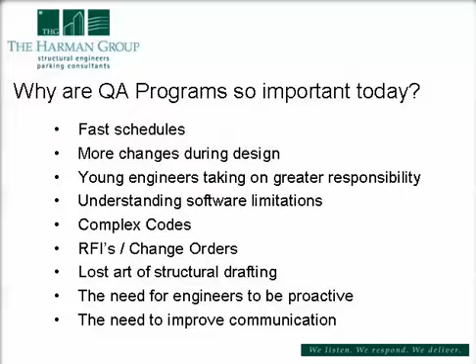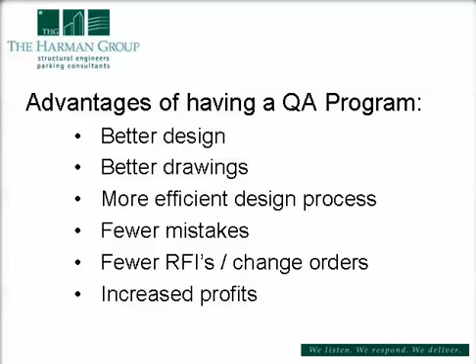So the advantages of having a QA program are we're going to see better design, better drawings, a more efficient design process. There should be fewer mistakes on our contract documents, fewer RFIs and change orders, and since we're all in business to make a living, earn a living, increase profits, hopefully.

Now, before I talk about our QA program, I just wanted to point out two publications that everybody in this room should have a copy of. The first one is CASE document 962D, a guideline addressing coordination and completeness of structural construction documents. This came out a couple of years ago, and basically this could serve as a template for producing a quality assurance program. It basically addresses the reasons why structural construction documents have suffered in quality over the last few years and what can be done to turn it around.

The second publication I recommend is The Contractor's Guide to Change Orders. When I came across this book a couple of years ago, I felt as if I was a football coach who stumbled upon the other team's playbook. This publication basically tells contractors how to mine a set of contract documents for change orders. So I read the book, and I just made sure if they said, look for this, I made sure our drawings didn't have that flaw.

So I highly recommend both of these publications. This is a little bit more entertaining reading, only because you can feel the pain as you read that and realize that, geez, that contractor has this book.

Okay, 20 years ago when we started our QA program, it was comprised pretty much of a QA manager who was in the office 8 hours a day and available to answer questions. And before our projects went out for bid, he did a single QA review and reviewed the drawings for mistakes and for completeness. But because of fast-track scheduling, that process doesn't work anymore.

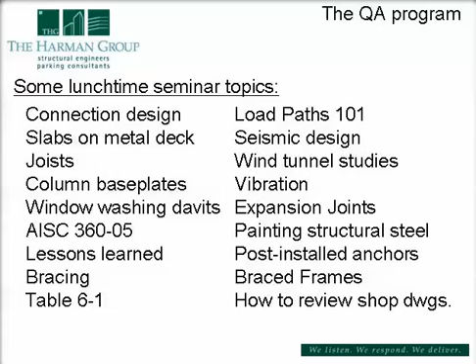Design standards. We have in-house design guides, office standards, and checklists for all topics related to structural engineering. The purpose is that there's more than one way to design a building. With steel design, you can either use ASD or LRFD. Each one is perfectly acceptable, and there's no problem unless one engineer is putting service load reactions on the drawing and another is putting factored reactions on the drawing. That could be a problem. So to get everybody on the same page, you have to have office standards.

Checklists are invaluable. They serve as a roadmap of sorts to help engineers go through something they've never done before - window washing davits, for instance, again as an example. What do you have to know about them? Where are the typical details? How do you design them? What are the loads? The list goes on, basically endless. Our quality assurance program is an ongoing work in progress, and it'll never be complete. As we come up with new things, we add them.

Drafting and CAD standards. I was talking before about the lost art of structural drafting, and our drafting and CAD standards try to address that problem. We have standardized drafting procedures, checklists, typical details, go-by drawings, and standard blocks. The big thing on this list is the go-by drawings.

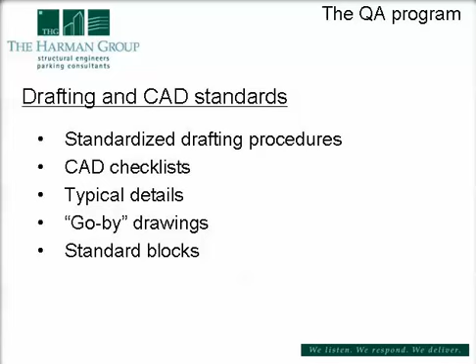If our framing plan is missing something, if somebody says you don't have a whatever, we'll add it. The other advantage of go-by framing plans is they prevent a gradual divergence in standards. As companies get bigger and you open multiple offices, you can gradually see changes between offices - a divergence - and this is an attempt to address and prevent that.

Our project delivery system is basically a series of checklists and procedures that help take engineers from the beginning of a project through the end. This is the roadmap that they follow.

At the beginning of a project, in the project startup folder, there are checklists telling the engineer what they have to do. One thing is to fill out a design criteria form, which has all the loads, design standards, fire ratings, everything related to wind and seismic. That form is filled out and updated as more information becomes available, and it's there for everyone working on the project to see in the project notebook, so there's never any question about the design standards for that particular project.

The engineer is told to set up a meeting with the project manager and the quality assurance manager, and we go over the project and how they intend to frame it and all the little details. We talk about various structural systems and the optimal way of framing the steel, if it's a steel building, etc. Then you carry the project through, and when you get to construction administration, we have checklists for structural steel shop drawing review.

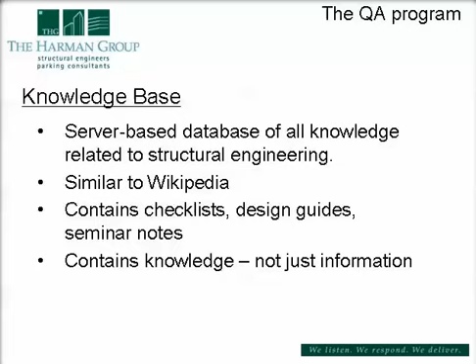It explains what could be a difficult topic and puts it into perspective. And finally, the sixth component is involvement of the QA manager: establishing and maintaining design and drafting standards, answering technical questions, staff training, performing QA reviews, and reviewing the framing plans and details before they go to CAD.

I want to see the details before our CAD department spends a lot of time drawing them up. I don't want to get 5 sheets of details and bleed all over every detail. That's demoralizing to me, and it's demoralizing to the engineer who did the details. And the CAD guys are going to be grumbling. So it's better to work through all of the problems with details before they're drawn up.

And that also provides valuable one-on-one training between myself, or another senior engineer who might be helping out, and the engineers who are coming up with these details.

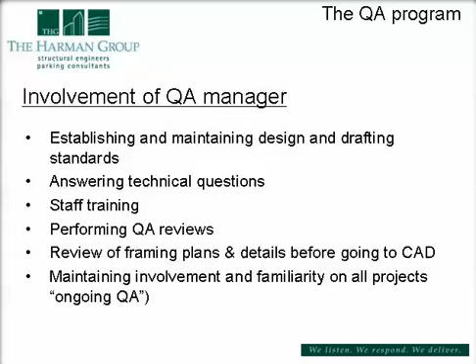One of the important keys to quality assurance is that it be ongoing. It's not enough just to get a set of drawings thrown on your desk at the end of a job. QA has to be an ongoing process, and it requires the QA manager to maintain some level of familiarity with all the projects as they progress through design. It's more or less a proactive approach to catching problems early before they become difficult to fix. Ongoing QA is basically the key to enhancing efficiency and productivity and squeezing as much as we can out of the QA process.

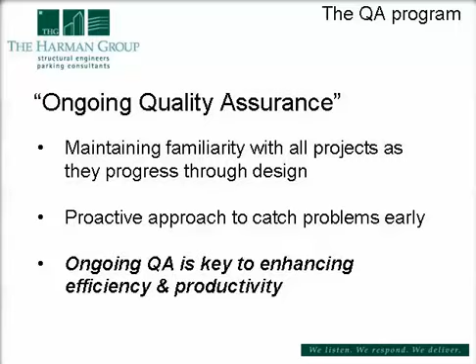So that was a summary of our QA program. Now I'm going to talk about the quality assurance review strategies and tactics. QA reviews are in-house reviews conducted to verify that our design and documentation is in conformance with the procedures and practices mandated by the QA program.

There are two primary purposes. As structural engineers, we all know that redundancy is good, right? As the QA manager, I'm not the primary load-carrying member of the design. The primary responsibility to get that design right falls on the design team in our office working on that project. But the QA manager provides a second set of eyes in order to catch mistakes that may have slipped through the cracks. And the second purpose of the QA review is to monitor the effectiveness of the QA program.

If I continue to see a certain problem slipping through on job after job, that's a sign something isn't right with the QA program, that something has to be fixed. We had this problem a couple years ago with the seismic response coefficient for steel structures. In areas of low seismicity where most of our work is done, you want to use an R factor of 3. But I was seeing 3.5, 6, because engineers would figure if 3 is good, 6 is even better, not realizing they were putting a lot of cost into the connections. Since we design our own connections, they didn't even know what was involved in designing a connection with an R factor of 6. It was that unknown about what the seismic response coefficient was doing that led us to add information to the QA knowledge base, and we gave seismic seminars to drive home that point.

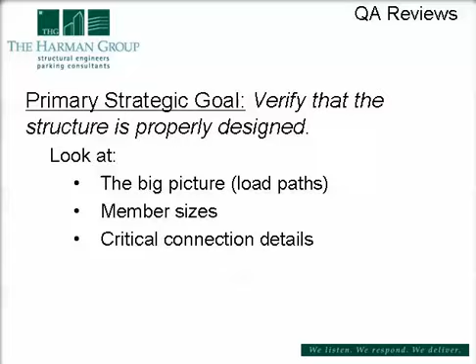There are two overriding goals when performing a QA review. The primary strategic goal is to verify that the structure is properly designed -- not to oversimplify it, but basically to make sure the building doesn't fall down. That involves looking at the big picture, load paths, member sizes, and critical connection details. The secondary strategic goal, in simple terms, is to make sure we don't get sued -- to make sure our construction documents are complete, coordinated, and correct.

We want to look at the drawings through the eyes of everyone that's going to be using them. Is the contractor going to be able to understand our drawings and get all the information they need to build the structure? Is the detailer going to get all the moments, reactions, shears, member sizes, and have all the dimensions? Are the inspector and building official going to understand our design intent? And the engineer performing a peer review, is he going to understand our drawings, are they complete and correct? And likewise for the engineer shooting spitballs at our design.

The young engineer reviewing shop drawings is important, because if that young engineer can't decipher what's on our drawings and can't clearly understand the structural drawings, the likelihood of finding a mistake that slipped through the detailer is going to be greatly diminished. If our drawings are complete, correct, and coordinated, the detailer isn't going to have many mistakes on the shop drawings, so this young engineer is going to have a much easier time reviewing them. And finally, if something goes wrong, what is the legal profession going to say about the quality of our construction documents?

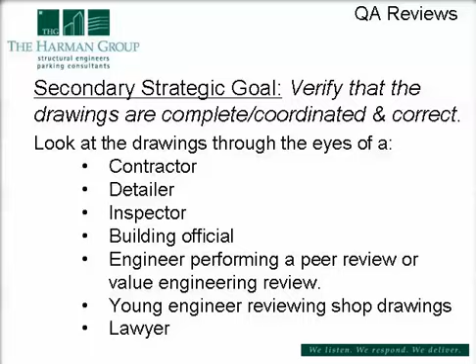So these are the tactics used when we perform QA reviews, and I'm sure anybody who has reviewed a set of drawings before can probably add to this list. But generally, you look at the big picture, verify load paths, etc., and I'm going to go into each of these a little bit in depth.

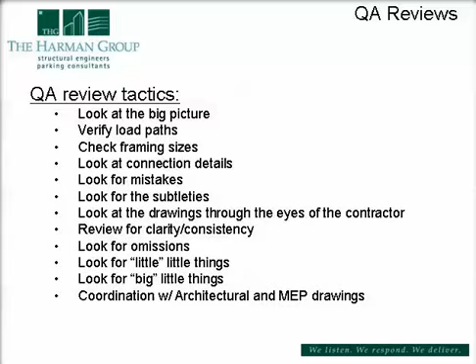Looking at the big picture -- engineers who work on projects every day can sometimes lose sight of the big picture. Someone with a fresh set of eyes on the structure can sometimes see things that pop out that weren't apparent to somebody working on the job every day.

Load paths, problems with connections, inefficient framing, the wrong loads being used, missing loads, problems with the computer model. I was reviewing a model a couple years ago, and the engineer had the switch turned on that generated the self-weight of the structure, but they thought that switch was turned off, so they put the self-weight in manually -- they had the self-weight in twice. So our foundations were a lot heavier, everything was heavier. That's better than the other way around, if they had the dead load turned off and only had the live load in. Problems with the R factor -- I discussed that before, that's something I think we finally got figured out in our office. And missing or improper expansion joint layouts.

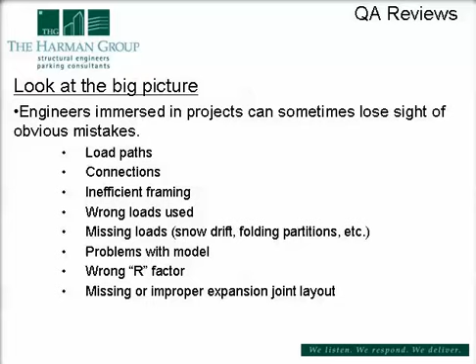Load path issues. Are there any unrealistic load paths? Are there any loads jumping in and out of shear walls or braced frames, or any unrealistically rigid diaphragms?

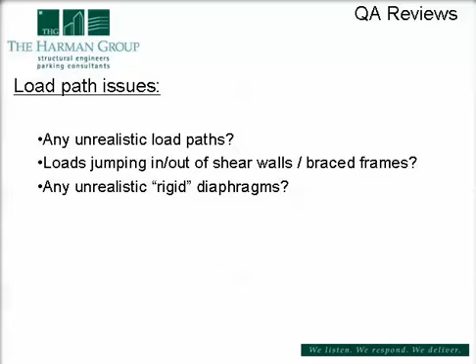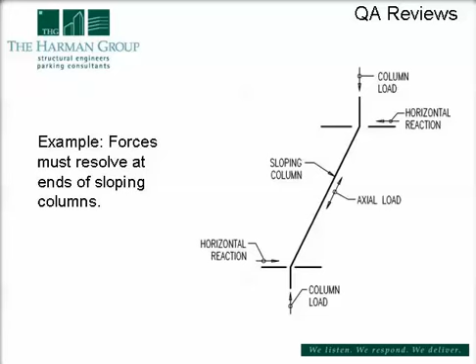Here's some examples. I know most people in this room probably figure this is too elementary to mention, but there have been real problems when engineers fail to consider the horizontal reactions at the top and bottom of sloping columns. Everything has to resolve out. It's not enough to just consider what happens here and design that member. You have to follow it to see how this reaction and that reaction eventually meet up again. Usually they cancel out via a braced frame or shear wall, or an opposing sloping column on the other side.

We did a job several years ago, a parking structure about 300 feet long, and we modeled it on computer with a rigid diaphragm, and it was pretty torsionally stiff. We had shear walls on three sides and a moment frame on one side. The computer said that 95% of the lateral load went into this shear wall. But we weren't comfortable with this.

We're never going to put less than the tributary load on one of the brace frames or moment frames in the lateral load resisting system. So what we did, and what we do on every job, is we made this 50%, and we probably made this something like 75%. We enveloped it. We didn't want to just make this 50% because this diaphragm does have some rigidity, and it's going to take more than 50%, but not 95%. Add to that, in this particular case, this was a precast concrete parking structure - the floor diaphragm wouldn't have been able to get that 95% of the shear into that shear wall anyhow.

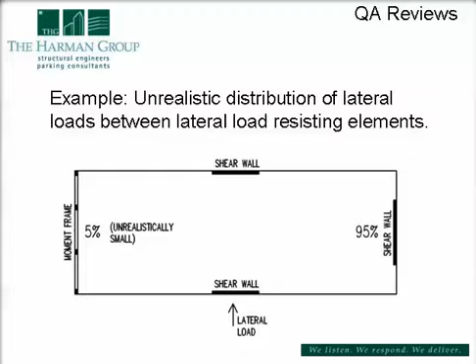So this is something we address - we're not going to leave it like that. We're going to make sure this brace frame can take its tributary load.

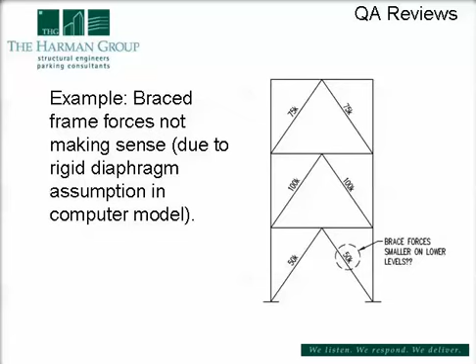Here's another one. In this case, we have a braced frame that, for whatever reason, had to shift over a couple of bays on the lower level. So you look at the computer model, and down here you see a W12 by 19 or a W14 by 22 on the framing plan. That's because in the computer model there's an infinitely rigid diaphragm, and the computer says all that load will just get sucked out of this brace frame and shoot over here through that 6.5-inch slab or whatever it is - it's going to completely ignore this drag strut.

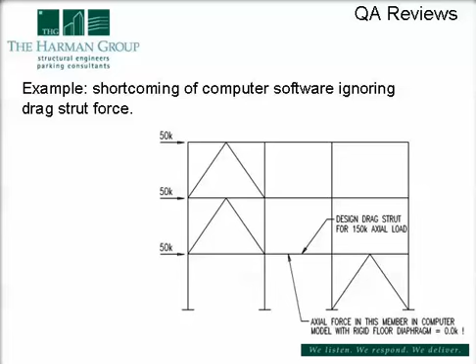So again, limitations on computer software are one of the big things I spend my time searching for problems on and finding problems with. What we need here is a drag strut good for 150 kips or whatever, and the connections for it, because we need a clear load path from that one brace frame to the other.

Check the framing. Somebody asked me once, you mean to tell me you check every single beam and reaction on all of the framing plans? And the answer is yes, but it's how I do it that saves time.

With computers, you could model 10,000 tons of steel in a couple of hours, but when those drawings are handed to me, I'm looking at them by hand. So what I do is review the typical beam, typical girder, and typical column in order to verify that all the loads and design constraints in that model are correct. If my manual calculations give me a beam, girder, and column design identical to what the model produced, then I can have a pretty high level of comfort that the rest of the framing was designed correctly.

Now, I'll still look at all of the member sizes. If the typical beam was an 18 by 35 and the typical reaction was 45 kips, then shorter spans with the same trib should have smaller sizes and smaller reactions. So you generally just get a feel looking through all the framing. Once you know the typical beam, girder, and column, you get a feel for what those reactions and member sizes should be in the rest of the floor.

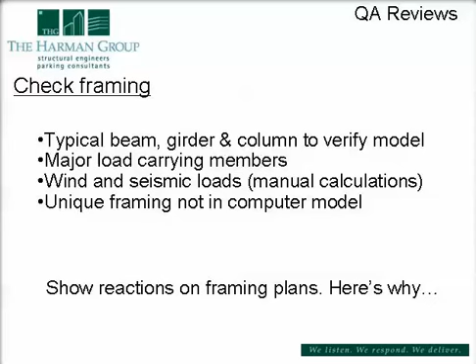So we've been doing it for that reason, but more so, when you show reactions on the framing plan, it basically makes QA reviews a whole lot easier because load paths are easier to follow. Mistakes are easier to find, and by showing the reactions on the plan you can see how hard the members are working. If you just look at a framing plan, and I've done this during peer reviews, when there's no reactions shown, I just don't have the same feel for how hard that structure is working as I do when I see the reactions.

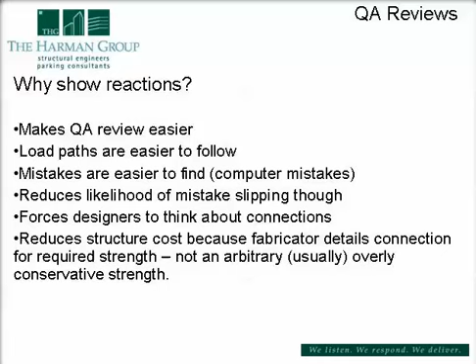And again, when you see the reactions, it forces the designers to think about the connections. If you see a 300 kip reaction on an 18 by 35, well, obviously that's a mistake because that's probably beyond the shear capacity of an 18 by 35. But mistakes just jump out of the page a lot easier when reactions are provided. And finally, of course, it does reduce the structure cost by allowing the fabricator to detail the connections for the actual loads.

When we do projects, especially fast track projects, we send drawings out, we send a mill order package out. Usually when that mill order package goes out, a lot of this information isn't known. So all of these blanks have to be filled in before the job is done, and a lot of this stuff can easily be missed.

Things like elevators, escalators, davits, window washing davits, stairs, hangers, theater rigging, folding partitions, mechanical loads, be they rooftop equipment loads or heavy hung piping, horizontal loads from rigging in theaters and ballrooms, catwalks and expansion joints.

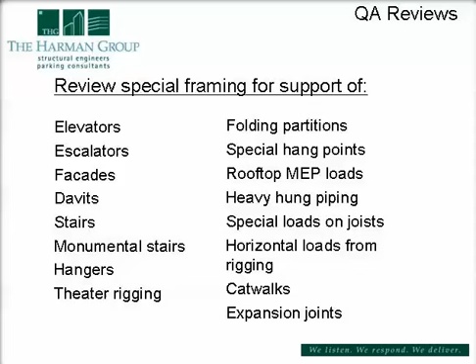These are things that generally you're not going to see. Some of this stuff you can model in your computer program, but you're not going to model davits in the computer program, and I don't know anybody who models horizontal rigging loads in their floor framing analysis, because usually that stuff isn't known until the very end of design.

We check critical connections, unusual connections, connections with complex geometry, or connections with large reactions. This is something I saw not too long ago - a really strange framing plan. I'm only zeroing in on a very small area, but basically we had a W40 by 593 framing into another W40 by 593.

These were huge loads. There was some sort of an artificial lagoon built on top of this floor, and the architect had certain constraints as to what they wanted the framing to look like on this side of this skewed beam. So I was looking at this and I quickly realized there's no way you're going to be able to detail a connection. This connection is virtually impossible to detail - it's too steep of a skew and too large of a reaction.

That's one of the problems with computers. You can do this and you can do whatever you want. You can have that beam coming in at a 2-degree angle if you want on a computer. You could have 12 beams framing into a column on the computer, but when it comes to detailing those connections, it's going to be very difficult. So we had to reconfigure this to make it constructible.

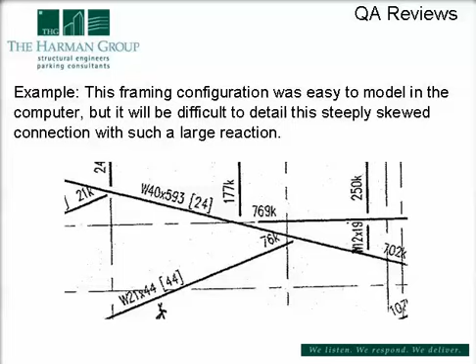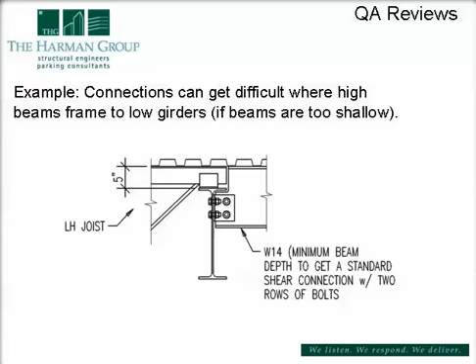This is something we've all seen when you have roof joists. There's always going to be some W shapes up on that roof, and if those W shapes are not deep enough, you're going to wind up with some unusual connections. So we want to make sure, in the case of an LH series joist, that we have at least a W14 framing into the girder so that we get 2 rows of bolts.

Look for mistakes: wrong reactions, members too small, improper framing configurations, missing sections and details. The list is endless. Here's one - we had a column with some beams and girders framing into it, and right before the drawings went out, we got some revised architectural drawings, and there was an opening thrown in there at the last minute. So we had to quickly move that girder off the column line, and it was framed into this beam, but the beam wasn't revised.

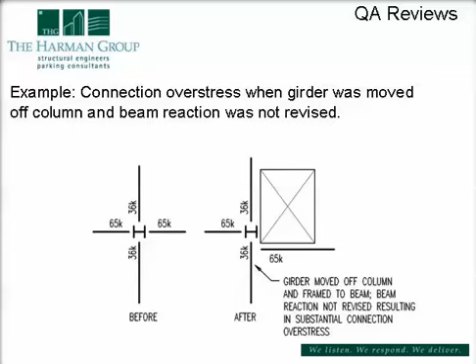And worse than that, the beam may have been able to take the moment, but now all of a sudden the reaction, instead of being 36 kips, was 100 kips. That would have been a serious overstress.

Look for subtleties. Subtleties include things that aren't apparent at first glance, like column splices at inappropriate locations. Typically column splices occur 4 feet above a floor, and usually the floor is bracing the column, but on occasion, if you have a small mezzanine, that floor is not bracing that column. So if a splice is occurring 4 feet above a floor that's not bracing the column, you've basically got a splice at the mid-height of a column that's twice as high as you think it is. And that's something we've seen before.

Expansion joints that are not properly configured wind up locking up the structure. Floor diaphragms that lack strength and stiffness.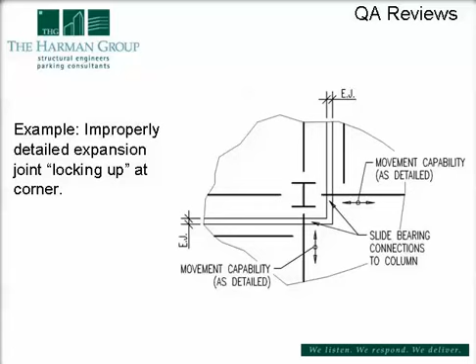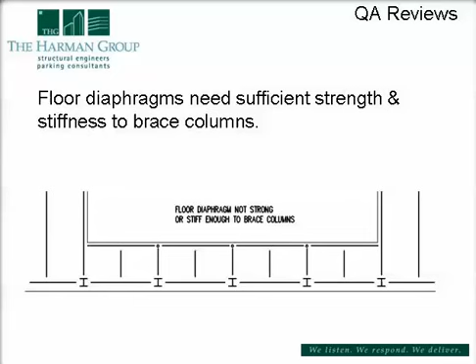This is a problem that occurred a couple of years ago. It was a theater we were doing. We had the stage and the main seating area, with balconies along either side. We had a rigid diaphragm modeled in the computer, and the computer was telling us that these columns, about 80 feet high, had to be W12 by 65s. But unfortunately, our floor diaphragm wasn't strong enough to brace those columns. It wasn't as clean as what you see here; there were a lot of zigzags back and forth. In reality, these columns had to be W14 by 211s. So that was a case where we would have had a serious overstress in the columns had we relied on the computer's answer by naively putting in that rigid diaphragm and relying on it.

Look at the drawings through the eyes of others. Is everything shown on the framing plans that will allow the contractor to build the structure without having to second guess or issue RFIs? Is every linear foot of the building covered by a section or detail? Is everything clearly indicated? I tell the engineers to take off their engineering hats when they look at the drawings, and look at them through the eyes of somebody who's not an engineer. Because basically our contract documents are directions on building the building. They're no different than the instructions you read when you're trying to put together a bicycle for your kid - and this is just a 50,000-ton bicycle. If your directions are not well thought out, the structure may not be built the way you anticipated.

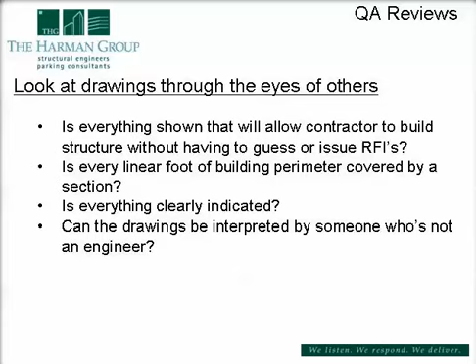Review for clarity and consistency. Look for conflicts between the framing plans and the sections or details, and inconsistencies with the framing - group similar beams. We're a big proponent of the use of dittos. A long time ago when drawings were done by hand, if you had a long string of beams, you would have an 18x35 at this end, a string of dittos, and an 18x35 at the other end. Nowadays with computers, you don't get that, so you get some small subtleties - you could get 18 by 35s with 3/4 inch camber, 1 inch camber, a 35 kip reaction, a 37 kip reaction. What we do is just try to envelope it. I've talked to several fabricators over the years, and they said that when they see dittos and clean, simple drawings, it's basically a form of psychological warfare that can lower the cost per ton of your structure.

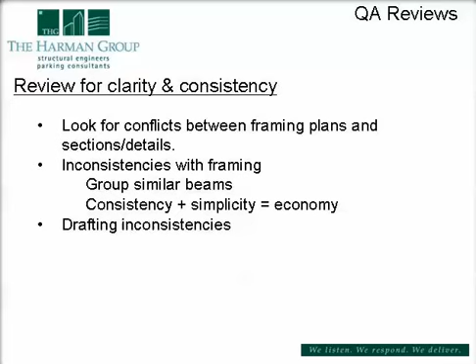Look for omissions. Missing things are always the hardest to find - they could be missing reactions, sections, details, dimensions, elevations, member sizes, reinforcing steel, even missing members. In a steel-framed office building, typically you're going to have beams at maybe 10 or 12 feet on center, but it's not unusual that for one reason or another you might have a spacing between two beams of 15 or 16 feet. It's not going to jump out, but you're usually going to have to add another beam in there.

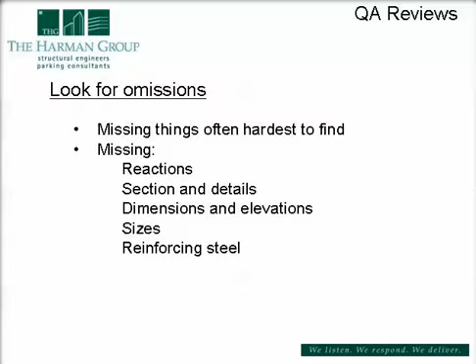This is a big little thing - an example of a drafting error that can cause a structural collapse. Our beam was moved off the column for whatever reason, maybe there was another opening put in here, and it wound up on top of the reaction. So the 111 kip reaction wound up looking like 11 kips, and in reality it's 155 kips. This is the kind of carelessness that can cause big problems.

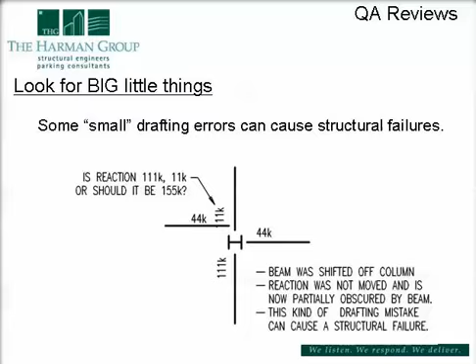Coordination with the architectural drawings - this is something I don't really go too far into because I rely on the design team in our office who's actually working on the project. But obviously, the architectural drawings have to bear some resemblance to the structural framing plans - dimensions, slab edges, facade sections and details, column locations, etc.

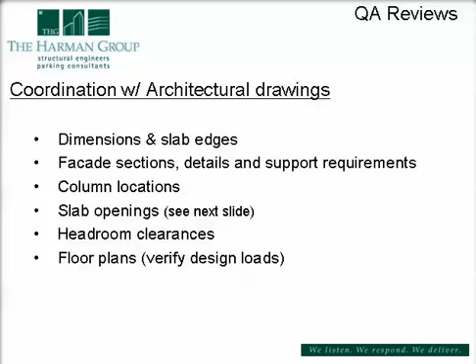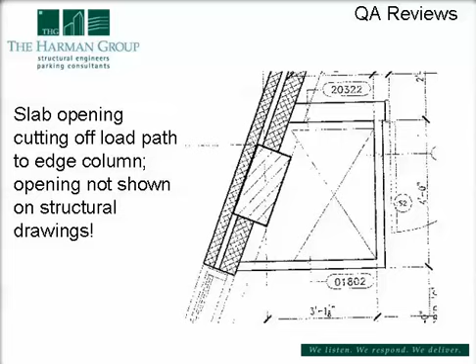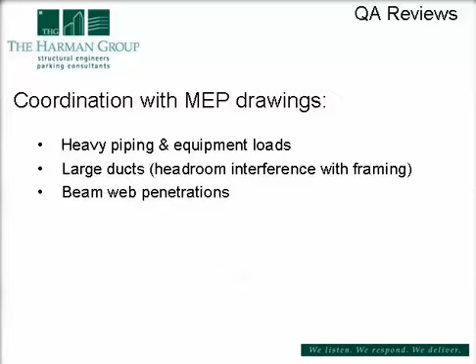The ongoing challenges to maintain quality include understanding software limitations, training new engineers, working in a fast-track environment, and improving communication skills. So what I talked about today was the 6 elements of a QA program: training for those young engineers, establishing design standards, drawing standards, project delivery system, a knowledge base, and QA reviews.

QA reviews serve 2 purposes. They provide a level of redundancy, a second set of eyes on the drawings, and they monitor the effectiveness of the QA program. And finally, quality assurance is most effective when it's ongoing. It's not something that happens at the end of the job.

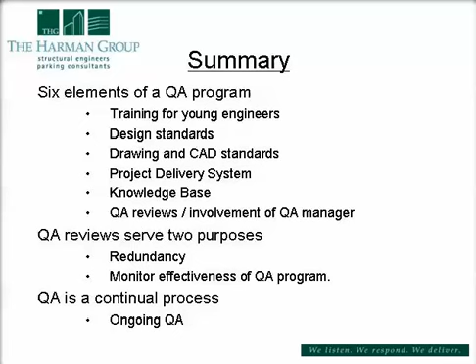And that's it. Any questions?

How many people are currently in your firm? We have about 50 people in our firm, about 40 engineers. One office or? We have 3 offices: Las Vegas, Philadelphia, and Pittsburgh.

How do you handle QA at the branch office? Well, actually, the guy heading up our Las Vegas office was the assistant QA manager before he went out there. So he used to help out doing the QA reviews, and what they do is they'll send their drawings to us, and likewise, when we're overloaded, we've been sending our drawings out to them to do the QA reviews. So with the internet, everything, we're all linked together.

Are you full-time just doing QA? Yeah, I'm the full-time QA manager. You don't do anything but QA? Well, no, actually, occasionally I'll jump in and help with connection design on some of the bigger projects, like that slide I was showing you with the 760 kip skewed reaction. I was working on that the other day. I thought, wait, this ain't going to work. So I also do connection design in the office.

2 questions. One is about scheduling, given that schedules sometimes get compressed or out of control of the design team, how do you coordinate the timely review, not having no reviews one week and too many the next? It's just a matter of prioritizing. Somebody said one time, you should prioritize everything, look at what's urgent and what's important. I go, everything that I do is important. So it's a matter of prioritizing what is the most urgent.